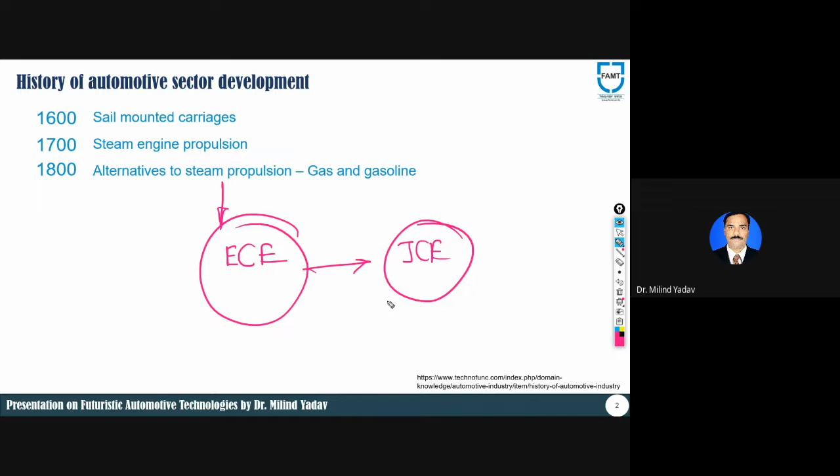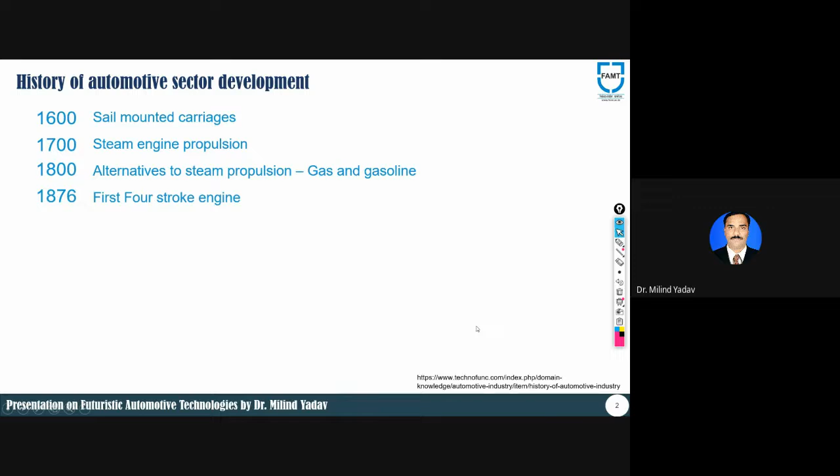Then came 1876, and in 1876 humans invented the first four-stroke engine.

Then in 1885 the real development started. The first practical automobile with a petrol engine was built by Karl Benz in 1885. Benz was granted a patent for his automobile in 1886, and then he began the first production of automobiles in 1888. His wife later on also proved it with the first long distance trip in August 1888.

Recently there was a video roaming around the social network everywhere, belonging to this same story, showing that the horseless coach was absolutely suitable for daily use. So that was the first development of the automotive sector, from where it started.

Then 1890 to 1910 - rather 1900 to 1910 - these are extremely crucial years in the history of the automotive industry. Industry as such started in this particular era itself. During the 1910s, the development of technologies and societal infrastructure continued, in addition to new manufacturing practices.

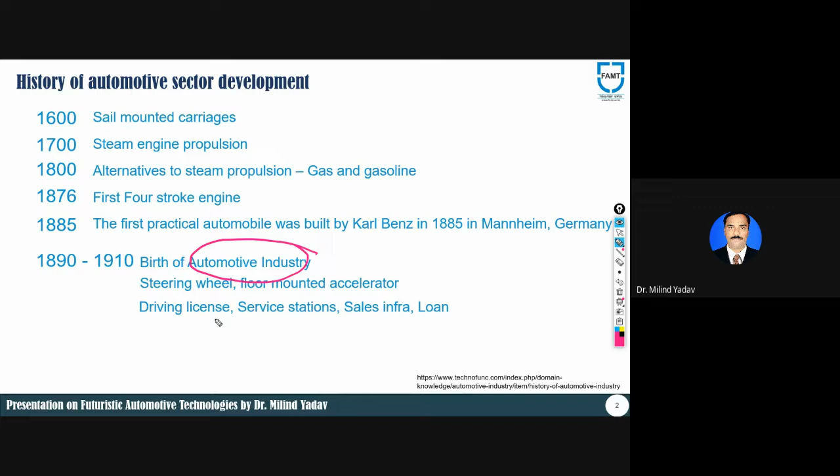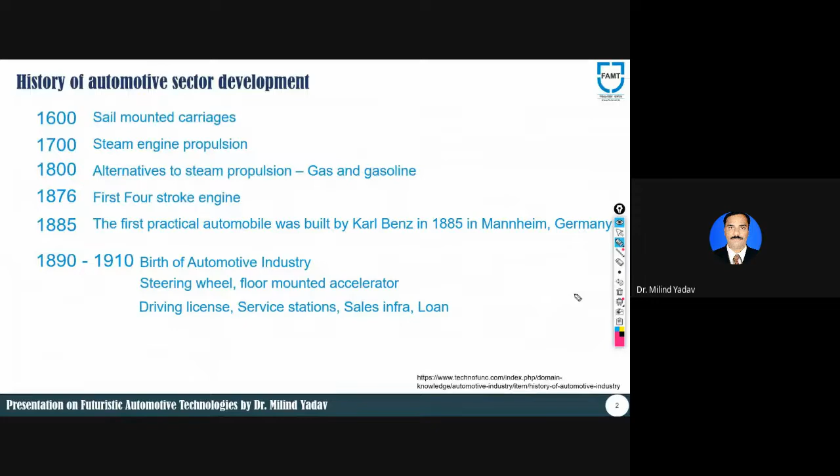In the same era, somewhere in 1908, Ford came up with his famous Model T. The mass manufacturing concept was introduced by Henry Ford - if I have to give you the precise number, it's 1913, where the concept of mass manufacturing started, basically scaling up production. Ford also introduced the concept of using interchangeable and standard parts, which further pushed the development of this sector.

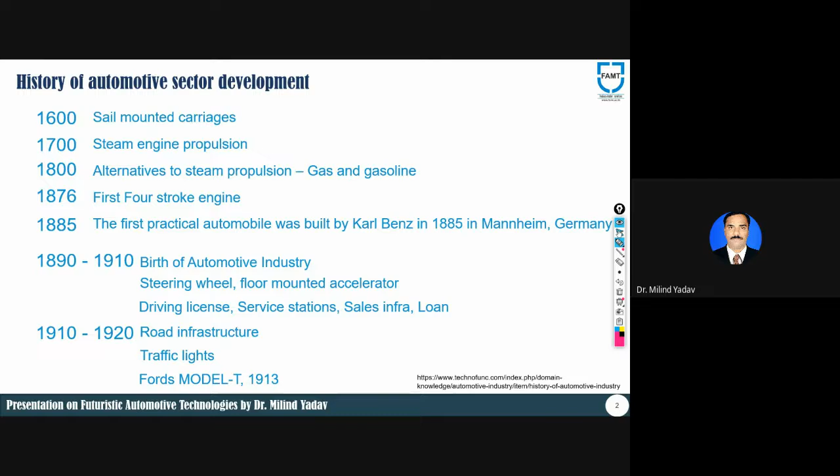Simultaneously, during this time itself, infrastructural developments like roads and traffic lights carried on. Then from 1920 to 1930, this is known as the era of mass production, and a variety of automobiles were available during this particular period.

Almost all the manufacturers, be it Benz, Daimler, Chrysler, or Ford, were involved in mass manufacturing. Ford stuck to the concept of a single model, the Model T, while General Motors adopted a new production technology and came up with lots of models, creating variety for buyers, which helped increase their market share.

After that, from 1930 to 1940, new market players entered this market, like Continental and Volkswagen. Even in this period, mergers of different companies took place, such as the Benz and Daimler merger, or the Chrysler and Dodge merger.

Then from 1940 to 1950, this is basically the era of...

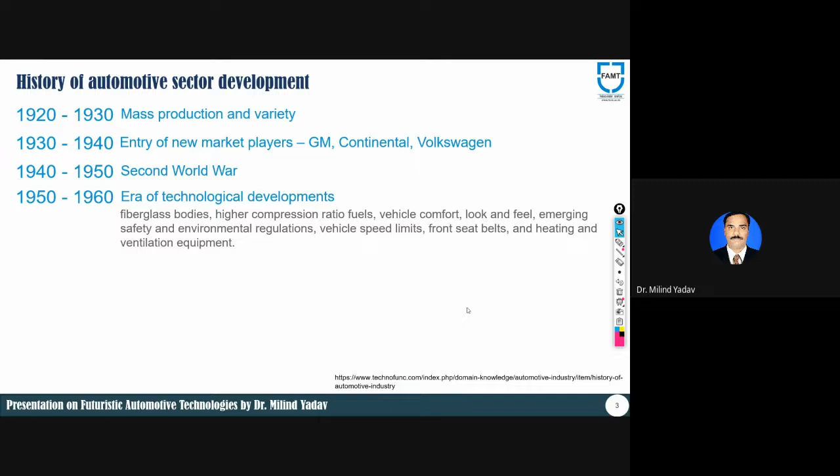Then during 1970 to 1980, we all know environmental regulations came, and emission norms came into existence. During this period itself, a part of globalization starts, and car exporting also starts, especially from Japan to the US.

And in 1980 to 2000, globalization actually started. Especially in India, we were a little late as far as globalization is concerned, but it basically started with mobile manufacturing way back in 2000, 2001, and then slowly we came closer to the automotive sector. So this is basically how the automotive sector has evolved.

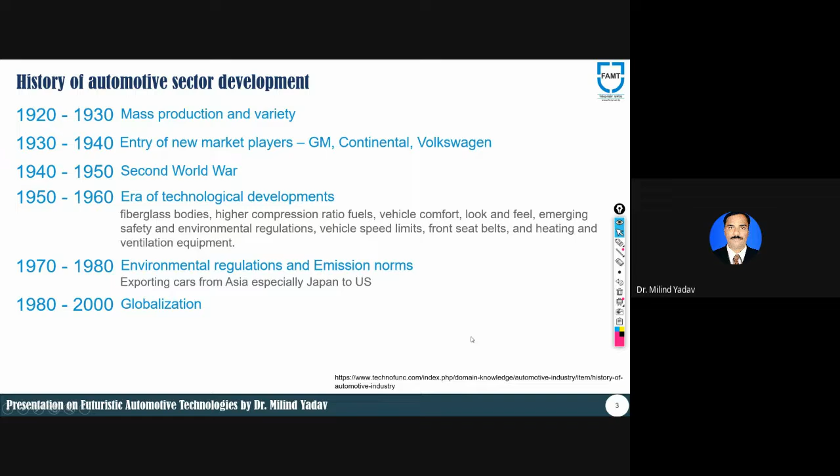Obviously there are a number of steps that must have taken place in between which I could not cover, but this is just a brief introduction.

We all know that autonomous vehicles are now taking over the charge. Autonomy is going to be the future. Then there comes the second one, connectivity - a lot of things are also happening in this sector. Then the third one is electrification of vehicles.

Then there comes artificial intelligence, AI. Then there comes big data analytics. Then there comes HMI, human machine interface, blockchain technology, and all.

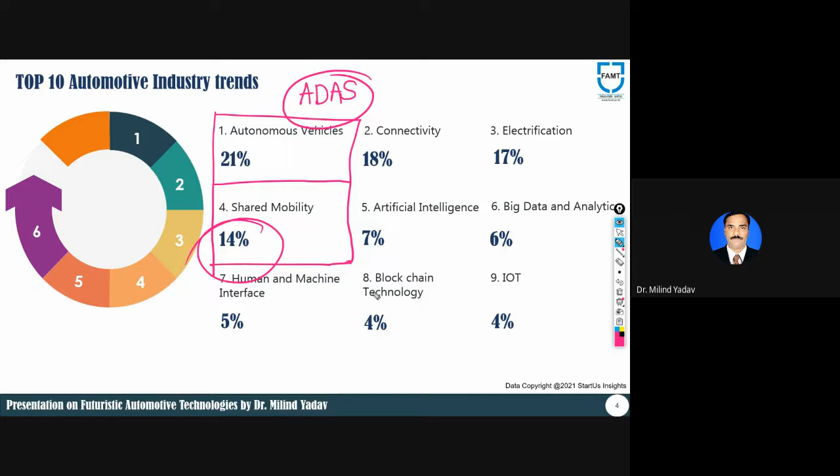Now, talking about others, let me throw light on some technologies which are not in highlight as far as the Indian automotive sector is concerned, but these are going to play a very crucial role in the coming days. Think of blockchain technology, big data analytics, or Internet of Things. In the near future, you'll find these numbers significantly grow.

As far as blockchain technology is concerned, you probably already know what a blockchain is, so I won't talk about that, but I'll talk about how it is useful in the automotive sector. Every vehicle will be given a digital identity, and every vehicle running on the road will have its own digital identity.

So now the car can pay for the use of road infrastructure, like toll booths or whatever it may be. Cities will also be able to charge for consumption and carbon emissions. On the other side, car owners can sell their seats.

If they're traveling from one place to another, they can offer a sharing of seats concept. They can also allow others to charge their vehicles, driven by batteries, if their own vehicle is not in use, and they can report flaws in infrastructure or accidents. These are the things proposed as far as blockchain technology in the automotive sector is concerned.

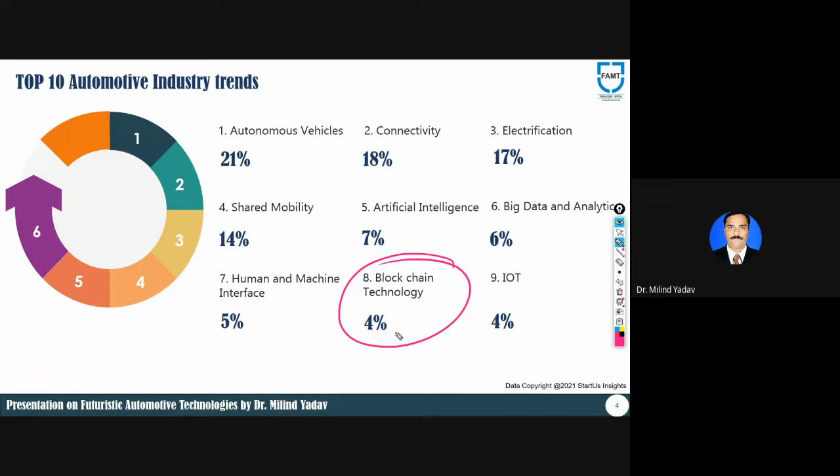Talking about this one, it is basically... sorry, not blockchain technology, rather I already had a discussion regarding this one. This one is basically big data and analytics.

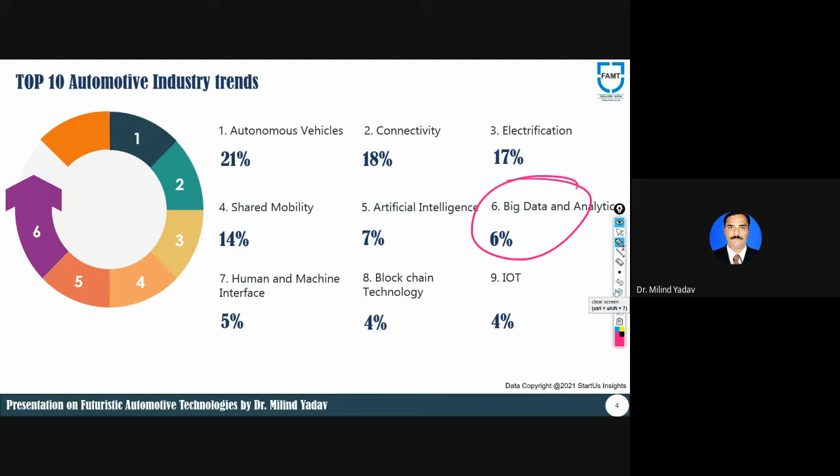So you'll be collecting a lot of data through GPS sensors, through cameras. And this data will be used by different agencies, maybe car leasing agencies, to predict the moment. Then these will give information regarding mileage, driver skill, driving pattern, and that data will be given to the insurance companies for warranty purposes, for maintenance, for predictive maintenance purposes, and a lot of other things. So even though the number you see right now is small, slowly, needless to say, these numbers are also going to increase in the near future, no doubt about that.

Now, like I said, in the initial phase you expect it to grow in this particular direction. And we have already started working on autonomous vehicle connectivity, and a lot of things are happening as far as electrification is concerned. This shared mobility sector is basically just beginning in India. You must be knowing Yulu, the Bangalore-based company which has entered into this.

So my concentration will be on the first and the fourth point as far as today's discussion is concerned. So let's start.

The point that I'll be discussing initially is Advanced Driver Assistance System, that is ADAS. Now let us try to understand what is basically the need of ADAS. That is an important factor.

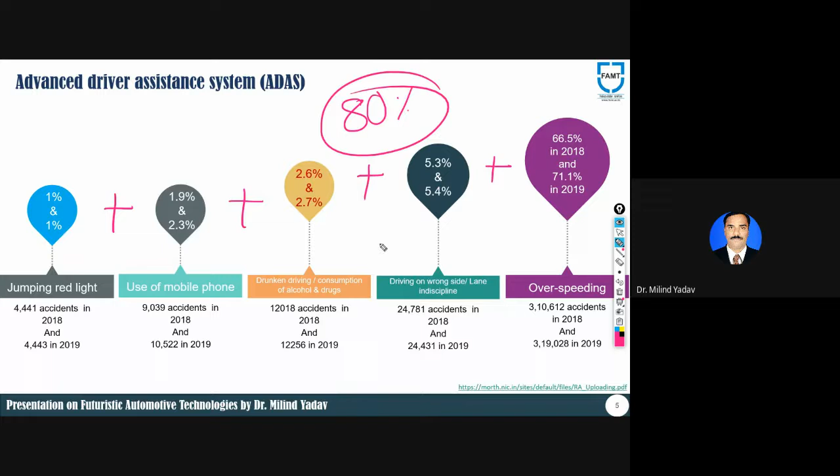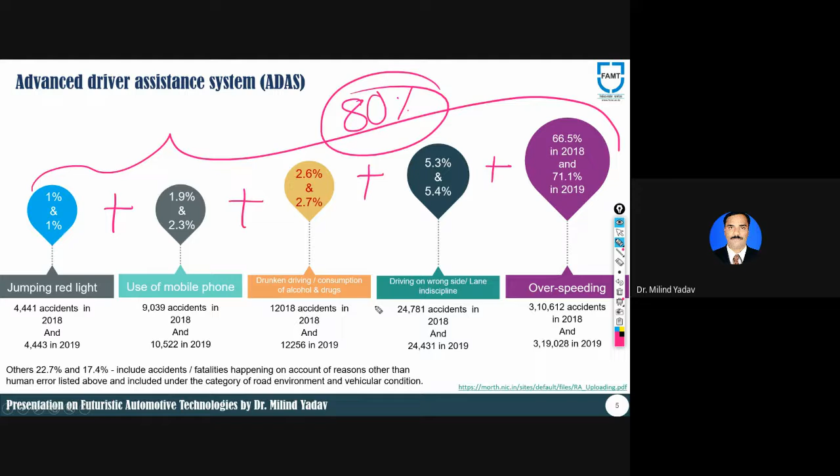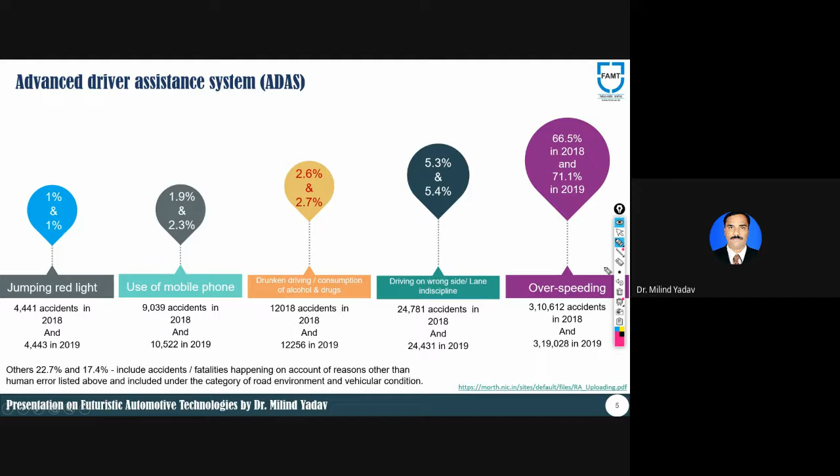And where does the remaining go? So the remaining 20% includes the accidents or fatalities happening on account of reasons other than human error. Now that may include road environment or condition of the vehicle, whatever it may be - a number of reasons for that. But these are the ones contributing as far as human errors are concerned. So by and large, it is well understood now that the majority of accidents taking place are basically because of human error.

Now, what is the solution to this one? Like I said, the majority of the accidents are taking place because of the driver. About 80% are happening because of driver mistakes during driving. So in order to prevent that, we are going to have a semi-automatic or a fully automatic vehicle control system that will not only take care of comfort, but will also take care of the safety of the passengers.

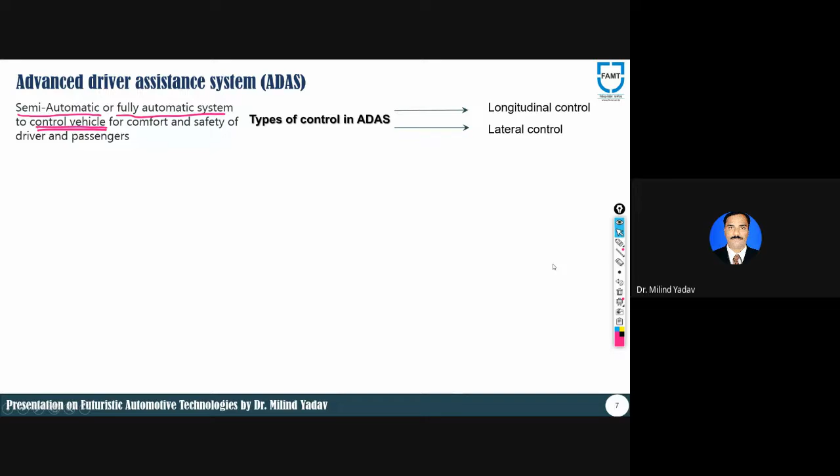So here it is proposed to have either a semi-automatic or a fully automatic system which is going to control the vehicle. Now, as far as controlling the vehicle is concerned, we can have two types of control: either longitudinal control or lateral control. Longitudinal control is typically referred to as speed control, and lateral control is basically referred to as steering control.

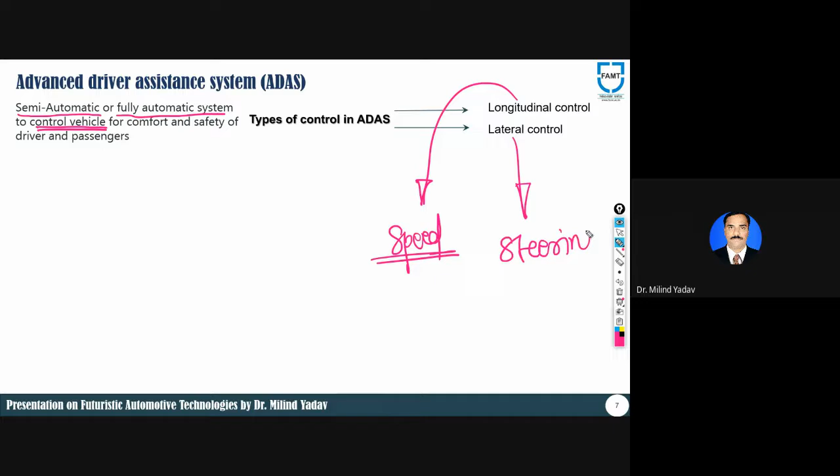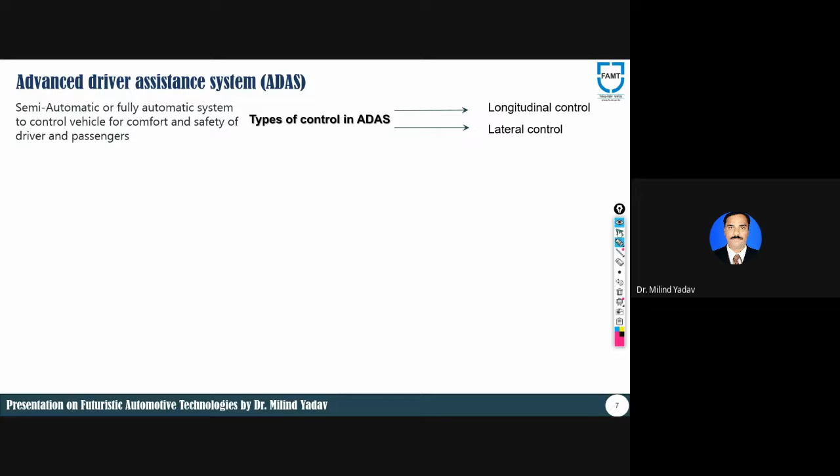By and large, we'll try to control these two things. Not only these two, but we'll try to control a few more systems as far as automobiles are concerned. So these are the overall systems that we'll try to control with ADAS. You can have control over a braking system, a steering system, a suspension system, the powertrain, and the battery systems as well. So all in all, this ADAS, advanced driver assistance system, can literally control these many systems as far as automobiles are concerned.

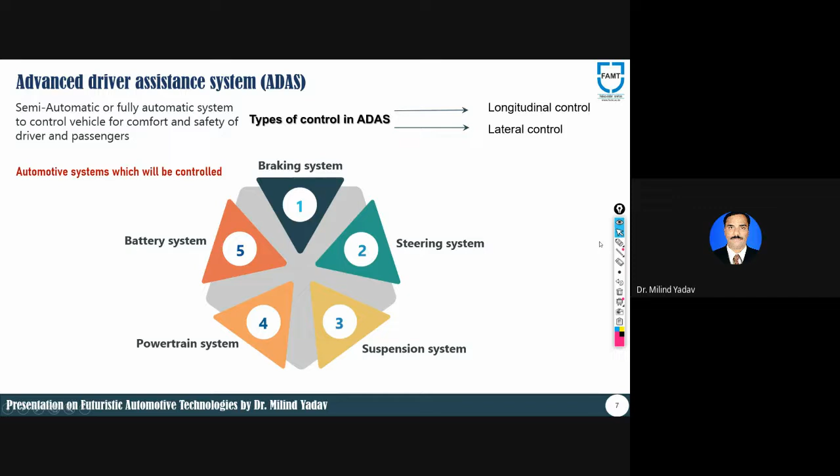Now let's slowly progress through. In order to control, obviously you need some data, right? So when the vehicle has to take a decision whether to stop, or when to have lateral or longitudinal control over the vehicle, then you should have some data from the surroundings. And to capture that particular data, your vehicle will be loaded with a lot of sensors.

Now I hope you are familiar with this one. I think you are familiar with the camera, you are familiar with radar. As far as lidar is concerned, it is basically light detection and ranging technology. It is a little bit costlier than radar, so hardly a few vehicles you will find loaded with this type of lidar technology. Now, for what purpose will we be using these sensors? Let's have a little discussion regarding this.

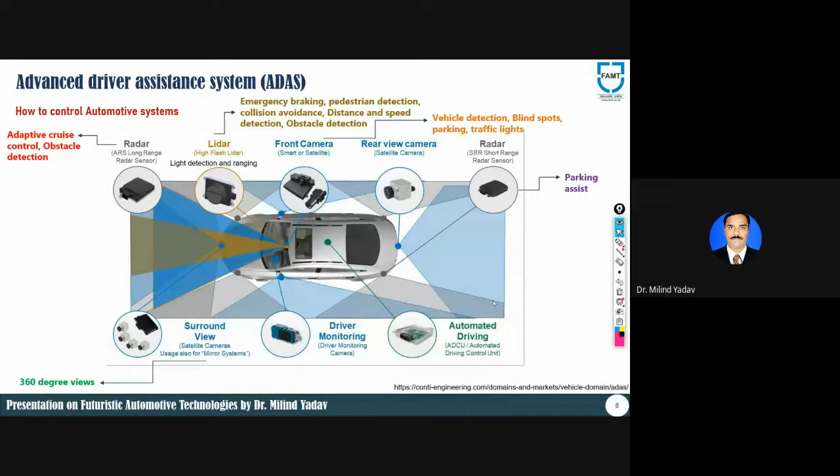So these are basically the cameras and the radars, and LiDARs rather, through which we will be creating a virtual environment. Rather, the car will try to identify that particular virtual environment for the decision making system. Now let us try to understand how these are basically integrated, how all these systems have been integrated.

So like I said, you'll be using a lot of sensors over here - I already talked about that. You'll be using cameras, radars, GPS for navigation, and other sensors, and these sensors are going to give surrounding information to the vehicle.

And then you will have one controller that is typically called the ADAS controller, and that ADAS controller is likely to give signals to the driver. If the driver doesn't respond to the signals given by the ADAS controller, then it is even possible for it to actuate the system - these are the systems we already talked about. It can control the braking system, steering system, suspension system, powertrains, battery systems, and many more. So this is how basically the systems are integrated in ADAS.

Now what we'll try to do is think of the warnings given to the driver. The warning will be in the form of a sound, so there will be exclusive speakers which are going to create a noise. Before that, the dashboard signals are activated. If the driver is alert, he can take the decision depending upon the signals on the dashboard. If not, if the driver is not responding to the dashboard signal, then the warning sound will be given.

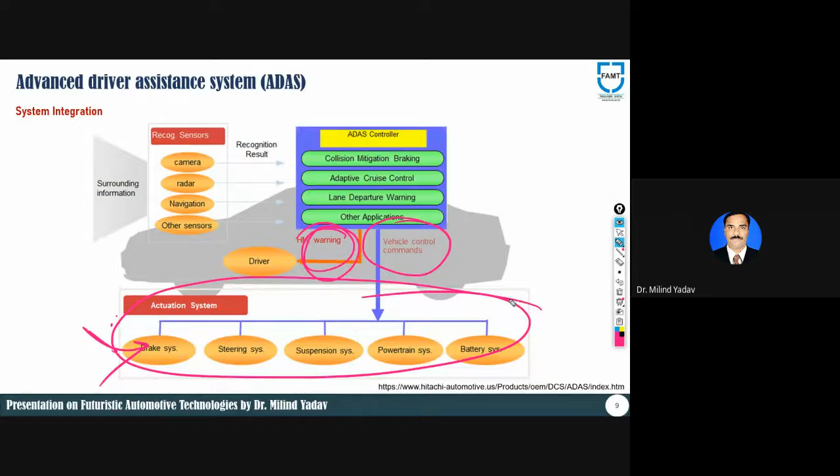And even if the driver doesn't respond to that sound, then in some vehicles it is possible to have vibrating seats or even a vibrating steering column, with the help of which your car will try to give a warning to the driver. And even if the driver doesn't respond to any of them, then the vehicle will take control - the ADAS controller will take control of the vehicle, and depending upon requirement, it will try to activate any of these systems. Most of the time, the control will be taken with the help of the braking system, in order to prevent accidents. So this is how basically the system is integrated.

Now what we'll try to do is understand the features of ADAS. Some of you might call this different types of ADAS or whatever it may be - I normally call this the features of ADAS.

And the first and most important feature of ADAS is obviously adaptive cruise control, typically called ACC. Now in this particular case, you'll have two vehicles - your own vehicle, which is typically called an ego car, and then there is one more moving ahead of your vehicle, which is typically called the lead car.

Now all of you must be knowing about this word, cruise control. What do you mean by cruise control? This is basically the system which will try to maintain the speed of the vehicle irrespective of the road condition. So you can literally fold your legs and simply have control of the steering, put your vehicle in cruise control mode, and it will carry on.

But adaptive cruise control is a little bit different than regular cruise control. While in cruise control, the vehicle will continue to run at a desired speed irrespective of road condition. When the system comes out of cruise control, if you are going to brake the vehicle, then it automatically comes out.

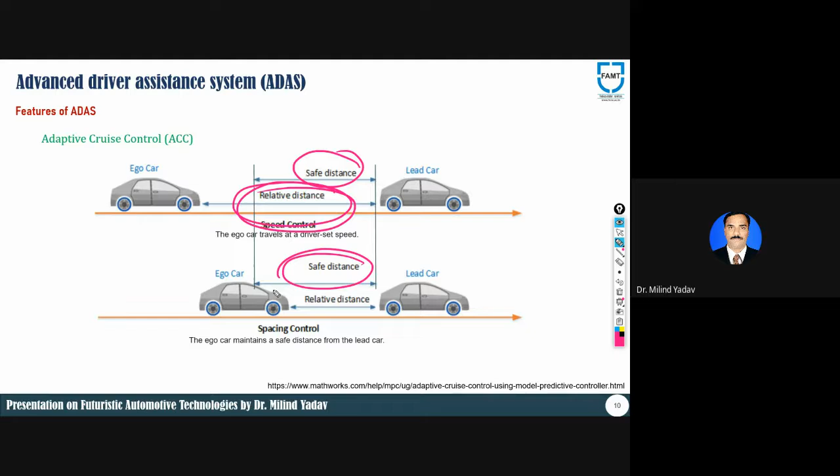Once the ego car crosses the safe distance, notice this - this is basically the safe distance. Now the distance between the ego car and the lead car is equal to the safe distance. If your ego car is going to cross this,

it will be noticed that the relative distance between the cars is now significantly dropping down, and immediately the ADAS system and ADAS controller will come into picture, and it will try to brake the vehicle automatically, maintaining this particular distance.

Now, if the speed of the lead car increases further, automatically this relative distance will increase. If this relative distance increases beyond the safe distance, the adaptive cruise control system will try to increase the speed of the vehicle, maintaining it in a regular fashion as that of regular cruise control. This is probably the best feature of vehicles equipped with ADAS.

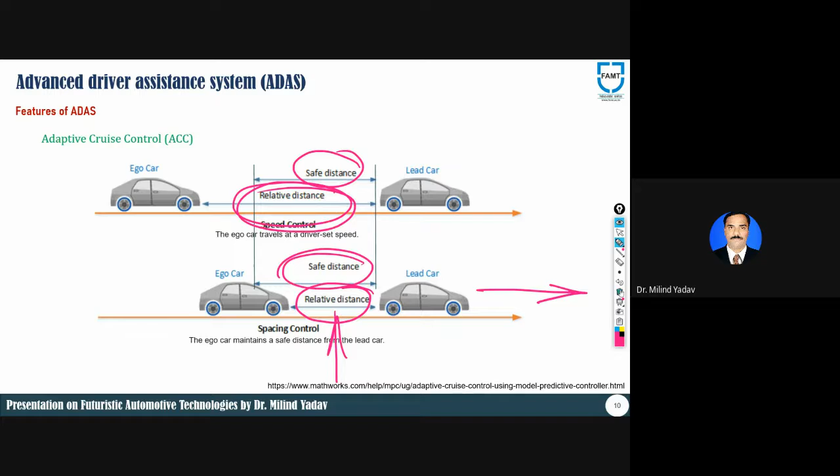That is the first one, adaptive cruise control, ACC. Moving on, the second one is AEB, typically called autonomous emergency braking. Now let me play this video so you'll have a brief idea.

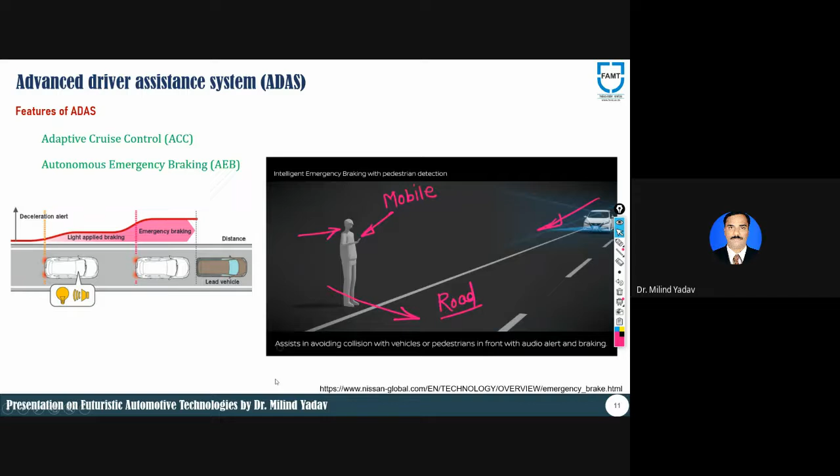Now if I play it one more time, please look at this - the vehicle is moving ahead, the pedestrian is moving on. The vehicle detects the pedestrian, and if the driver is not going to respond, the vehicle will be put into emergency braking. Now you must have understood the situation.

If I go to this particular figure, the situation is very similar to that of the adaptive control, right? What you see over here is the lead vehicle, and what you see over here is the ego car or ego vehicle.

The ADAS system will constantly monitor the speed and the deceleration rate after applying the braking. So once again, the same situation - look at this, the relative distance between the lead vehicle and the ego vehicle is dropping down, right? What is going to happen?

Initially, it will try to blink the signal onto the dashboard, giving warning through lights and through the sound system. But if the driver doesn't respond, for the initial phase it will try to apply light braking, and afterwards it will go into emergency braking, always trying to maintain the safe distance between the lead car and the ego car.

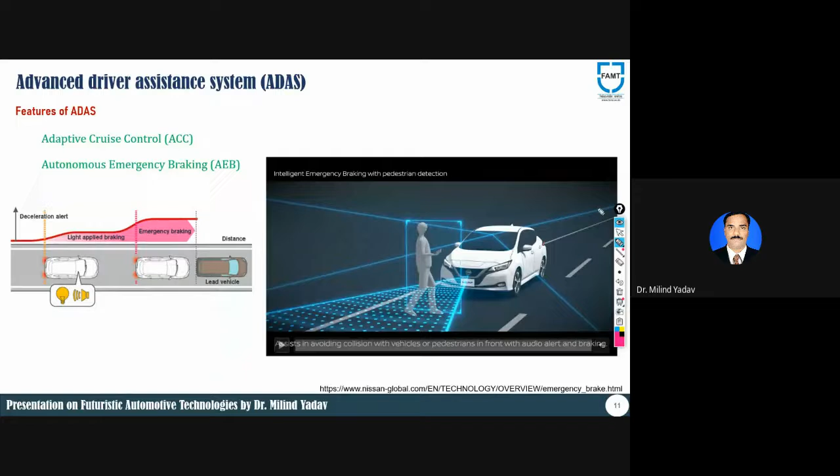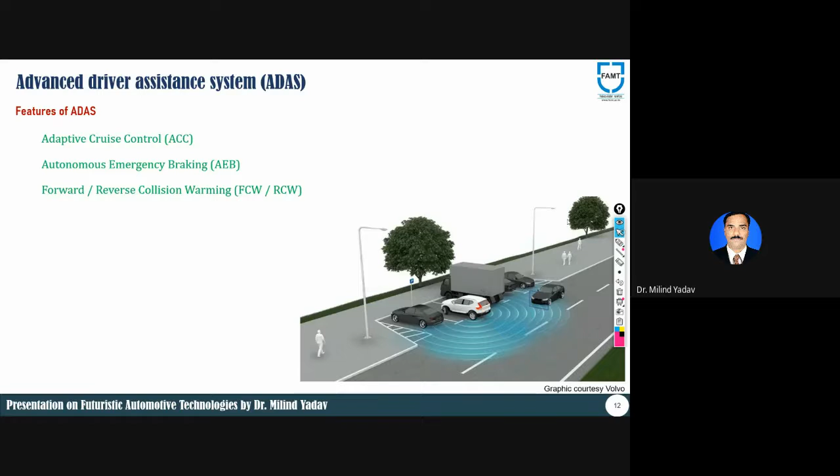This system has already been introduced in many cars. Nowadays you must have noticed that cars are fitted with proximity sensors on the rear side, together with the camera. This is basically part of that system itself. But in case of ADAS, the next step taken forward is to apply the brakes automatically, which is FCW or RCW, forward or reverse collision warning. Then there comes autonomous park assist, which is also very famous. A lot of vehicles nowadays are equipped with this, APS, auto park assist, or autonomous park assist, you may call it.

Obviously, the system is loaded with a display and cameras, on the front side as well as the rear side. Whenever your vehicle is driving and you are in search of a parking lot, most of the time the driver is going to hit the button inside the vehicle, and then the front sensor is going to start detecting for the empty parking slot, either with the help of the camera or the front ultrasonic sensors. It will try to find out the empty or probable parking slot.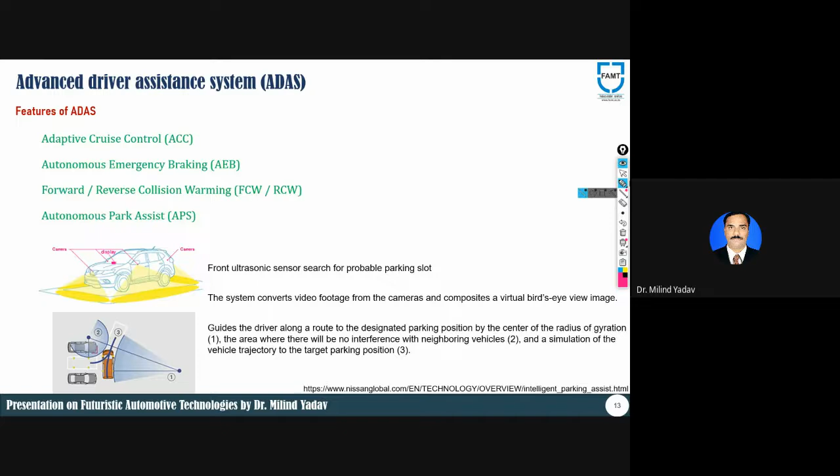Moving on, then there comes blind spot detection system, typically called BSD. By and large, every one of us must be knowing what is BSD, blind spot detection. Now, if you refer to any car, most of the time the structure of the car will be something like this. If I have to draw the structure, now you all are expertise in this one, but still I'm just trying to elaborate the things.

So it goes something like this: you'll be having a driver compartment, and then an engine compartment, this particular part of the vehicle. Then this is basically dedicated to the passengers, called the passenger compartment, and this is typically called the boot space. Now, as far as this construction is concerned, it is built on these pillars. Here is the first pillar, here is the second pillar, and here is the third pillar. This is typically called the A pillar, this is the B pillar, and this one is the C pillar.

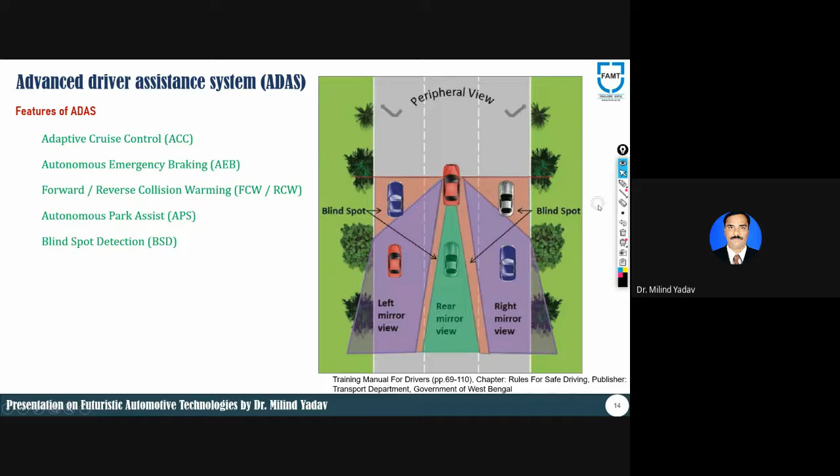Now obviously better road infrastructure is required, with the help of which it is possible for us to detect these lanes, and simultaneously it detects this particular distance as well. Now depending upon the lateral distance and the position of the lane, if the driver is decreasing this distance, then obviously a lane departure warning will be given to the driver.

And once again, the methodology will be one and the same. Initially it will try to display the signal onto the dashboard, then the warning through the sound system, and then if not responding, it will go to the braking. So lane departure warning is also a famous feature of the ADAS system nowadays.

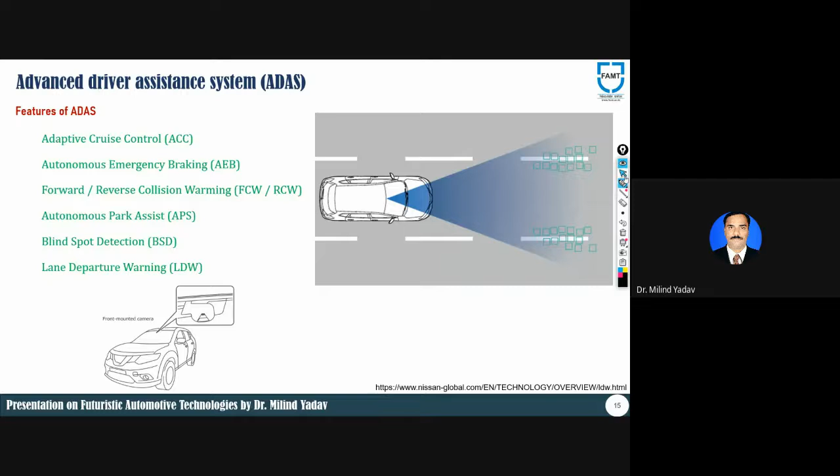Moving on to the next one is driver drowsiness detection system, typically called DDD. The latest vehicles, like maybe the XUV 700, recently from Mahindra and Mahindra, basically come with a driver's drowsiness detection system. There are different driver drowsiness detection systems available. Even some simple Python programming makes it possible to detect the drowsiness of the driver.

Some systems use cameras for the drowsiness detection of the driver, and a few systems which are a little bit more advanced try to analyze the driver's driving pattern in the first few minutes of driving. So starting from zero to the first few kilometers, it will try to identify how the driver is basically driving.

Then it will try to monitor the steering inputs given by the driver from time to time, depending upon different road conditions, and it also activates for no inputs from the driver. I mean, if it sees that the vehicle has to negotiate a turn and the driver is not responding to the system, this is going to come into the picture.

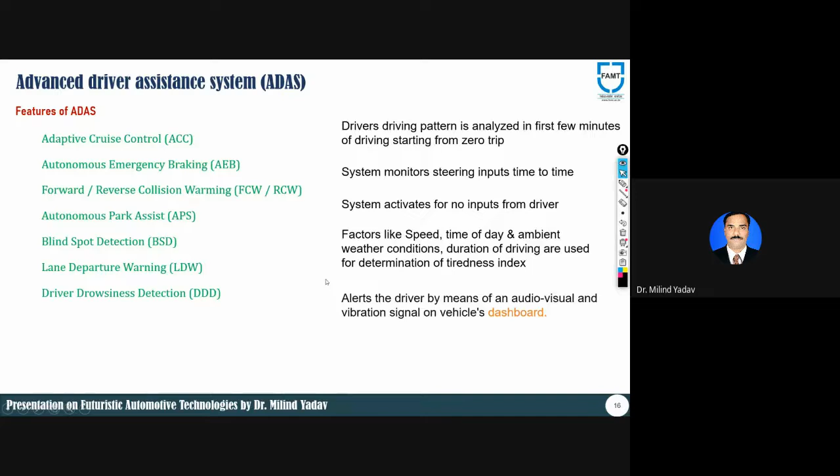Like I said, in case of the XUV 700, they have mounted a camera directly onto the front rear view mirror, next to the driver, and it constantly detects the movement of your eyelid. For a certain duration of time, if there is no movement of the eyelid, it immediately brings this system into activation. So that's the driver's drowsiness detection system, one more feature of ADAS.

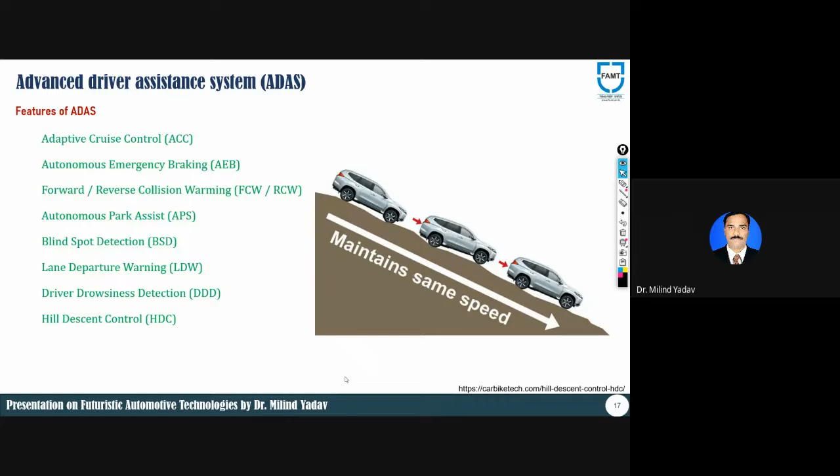Then there comes hill descent control, HDC. By and large, the system works in a similar fashion. Whenever it is going down, it always tries to maintain the speed of the vehicle while descending. If the speed goes beyond a certain set speed, then the braking system comes into the picture. If it comes across a lead vehicle, it will try to maintain the distance between the two vehicles, and there are many such systems. The traction control system, TCS, also helps in hill descent control.

Moving on, then there is adaptive headlight assistance system. This basically comes into picture especially while night driving. Most drivers have a habit of driving on high beams. So whenever a vehicle comes across another vehicle coming in front of it, considering the position of that particular vehicle, most of the time the right hand headlight will be switched to dipper mode, and the left hand will be kept on upper mode. This way the driver can have a clear view of the left hand road condition, and the vehicle coming in front will not get disturbed because of the high beam. That system is typically called adaptive headlight assistance.

With this, I've tried to give you a brief idea about the different features of the ADAS system. Now we'll try to talk about the autonomy levels in ADAS, and what their current status is.

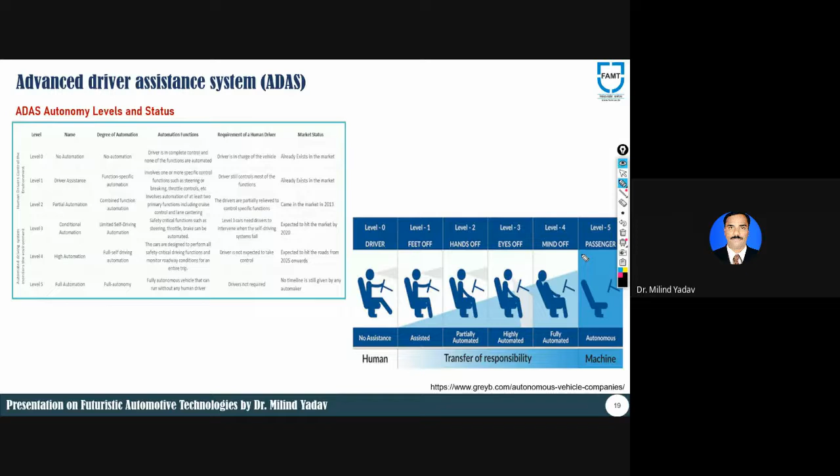Level 5 autonomy is full automation, which we call a complete autonomous vehicle - it can run without a driver at all. Drivers are not required. The testing of fully autonomous vehicles is still going on, but full-fledged autonomous vehicles are not yet running on roads. To some extent we have obtained autonomy, but I would say we are somewhere lagging. We are trying to transfer the responsibility from the human to the machine. As far as India is concerned, we are lying somewhere in between.

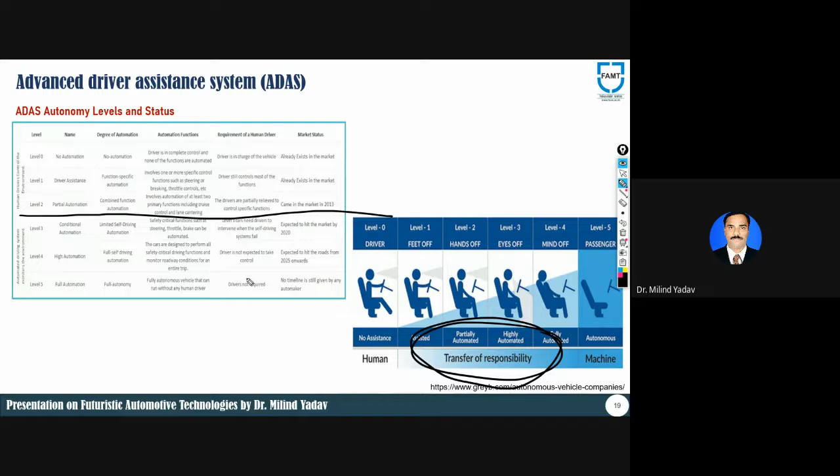Moving on, we will be talking about these points as far as ADAS systems are concerned.

As far as global suppliers of ADAS are concerned, Continental is into this business, Bosch is into this business for so long - this sector is basically dominated by Continental and Bosch itself. Denso is also there, Aptiv is also there, Autoliv is there, Magna is there, and Valeo is also there into this advanced driver assisted systems space. They are basically the suppliers - needless to say, they are not manufacturing their own vehicles, rather they are offering these kinds of systems to different automotive manufacturers. These companies manufacture technologies that are purchased and adapted by different automotive manufacturers into their vehicles. So these are basically the global suppliers of ADAS.

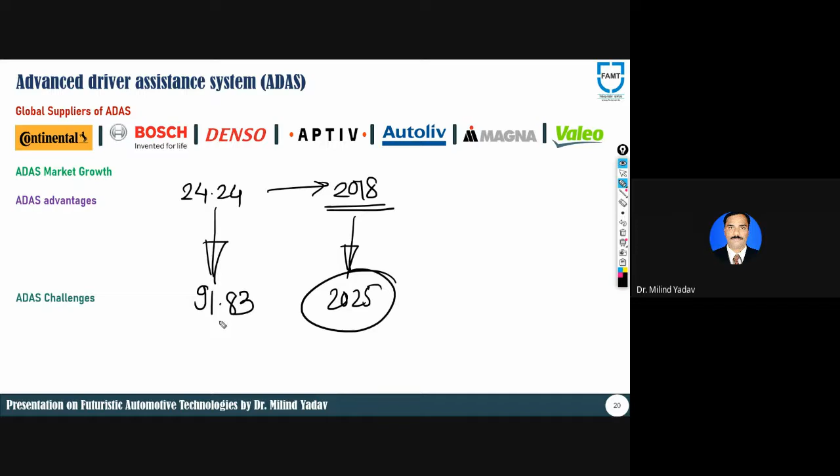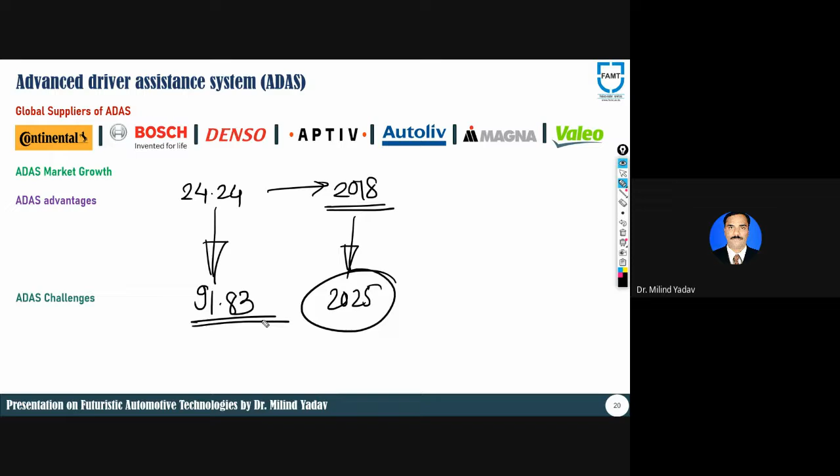Talking about ADAS market growth - this is a big market. To give you the numbers, it was a $24.24 billion industry in 2018, and by 2025, just the next 4 years itself, this will have a jump to $91.83 billion. So all in all, it's a huge industry, and lots of developments are going on.

Talking about ADAS advantages, by and large you must have understood what could be the probable advantages of this particular system. It basically tries to avoid human errors, minimizing them so that error-free operation will be possible with ADAS as such.

That is basically the objective of this particular system, and that takes into care increased road safety as well. It is taking control of the entire vehicle if the driver is not going to respond to the road condition identified by the vehicle itself. It basically alerts the driver in case the vehicle has a problem. To some extent, it is also easing out the driving experience with human machine interface, and this is going to help us obtain high safety standards.

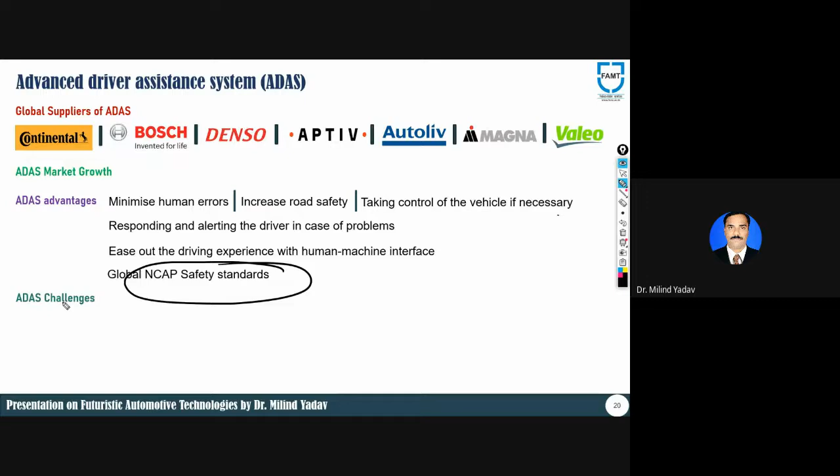Now you must be knowing that there is Latin NCAP rating, there is global NCAP rating, where the automotive manufacturers are struggling to reach the safety standards. So with ADAS, it is possible for us to reach very high safety standards. So these are typical advantages.

Well, the system also comes with challenges, and there are too many of them. I have tried to highlight some of them right over here. The first and most important is we are still missing efficient database management infrastructure. The data collected is huge, and you are badly in need of a database management system. That data is basically collected from different types of sensors, from cameras, whatever it may be, and you are badly in need of good software to process the data received from different sensors. So probably we are still lacking in this particular technological development.

The second, probably the most important one, is that this particular system is to some extent proven, but whenever a manufacturer proposes any kind of ADAS system, it has to go through 1 million kilometer testing to prove its capability, and this testing is obviously time consuming. It takes a lot of time. 1 million kilometers is huge. So that is one more challenge.

The next one is the cost of cars. Especially if I have to talk about Indian cars, most of the Indian automotive sector is basically dominated by the hatchback segment, and if you look at the cost of the hatchback segment, that ranges between maybe 6 to 8 lakhs. If at all you wanted to incorporate ADAS systems into hatchback cars where the cost ranges from 6 to 8 lakhs, it becomes a challenging task. So that is basically the biggest challenge as far as the ADAS system is concerned, the cost.

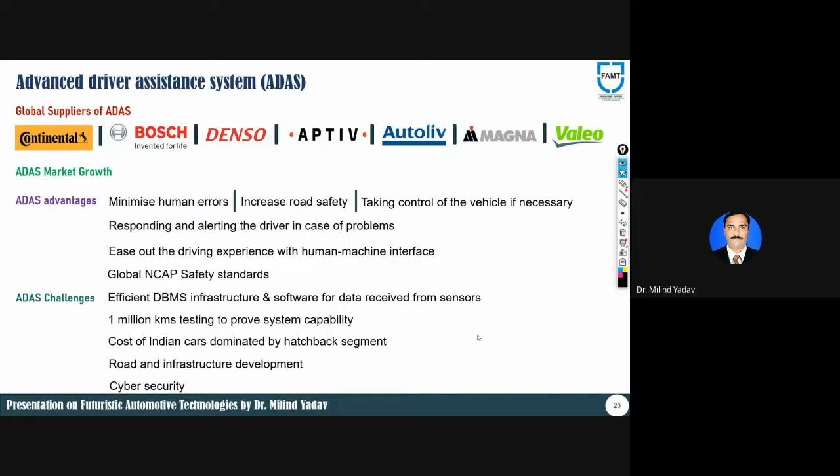Okay, now I'll switch over to the second part of my presentation, the technology which I'll be talking about, and that is micro mobility. Now, as far as micro mobility is concerned, if I try to split this particular word, it is basically micro plus mobility. Now micro stands for small, obviously we all know that, and mobility refers to the ways of getting around, you try to roam around. So it's the smallest possible way of getting around.

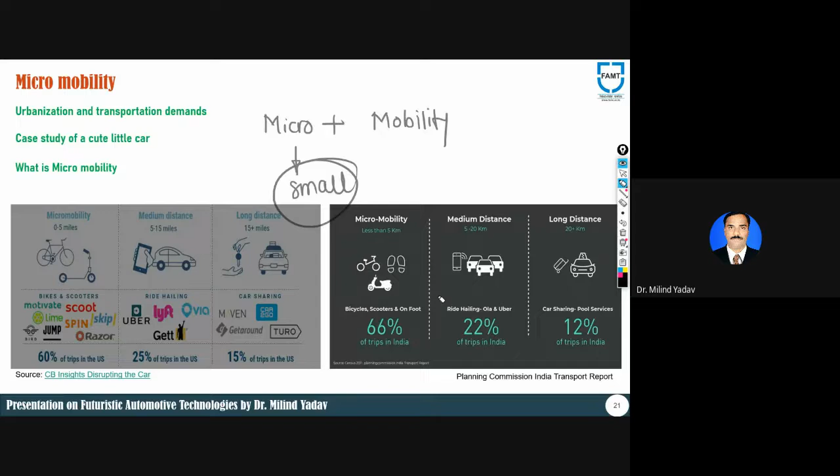That is exactly what micro mobility means. Now what I try to present here is two sets of data. One is data given by the Planning Commission of India, and the second one is basically from the US. If you look at this data, you'll understand it has been segregated by distances.

Let me check this one out. Can you see this? This is 0 to 5 miles, this is 5 to 15 miles, and this is 15 plus miles. This data is related to the United States. On the right hand side, this belongs to India, given by the Planning Commission of India. This is for less than 5 kilometers, this is 5 to 20 kilometers, and this is 20 plus kilometers.

Now what they have done is the total trips, all the entire trips, are divided into three categories: 0 to 5 miles, 5 to 15 miles, and 15 plus miles in the US. In case of India, they divided it into less than 5 kilometers, 5 to 20 kilometers, and 20 plus kilometers. Now look at the percentage.

It is observed that we basically use either cycles or bikes most of the time if we wanted to travel a distance less than 5 kilometers. Same is the situation as far as US is concerned. They use cycles for shorter distances, and that contributes 66% of total trips in India, and 60% of total trips in the US. So bikes, scooters, or maybe walking, even in case of India, 66% of the trips fall into less than 5 kilometers.

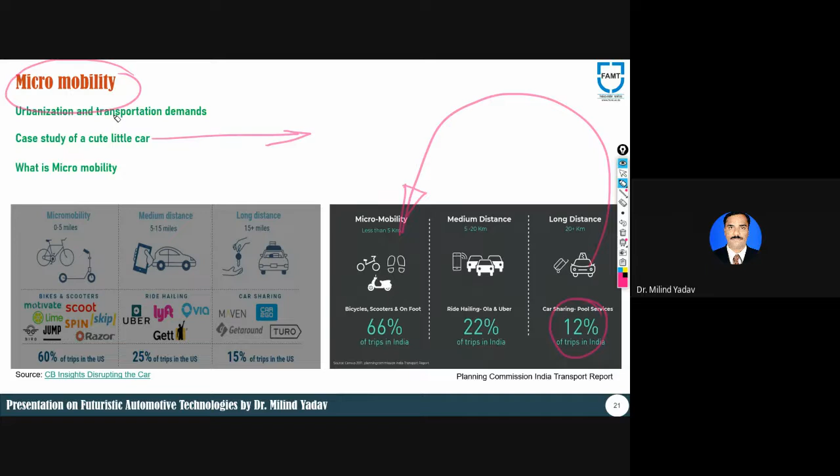Right now, like I said, you will be using different types of vehicles for this particular purpose. These will not be vehicles which are similar to cars. These will be altogether different vehicles, and which category of vehicles that we'll be using. But before that, let's try to define what is micro mobility.

It is basically the small transportation modes which are either propelled by humans or by electric motors, with the speed range well below 50 kilometers per hour. That is basically the definition of micro mobility vehicles. It can be driven through humans or through electric motors, no problem with that, but the speed is below 50 kmph.

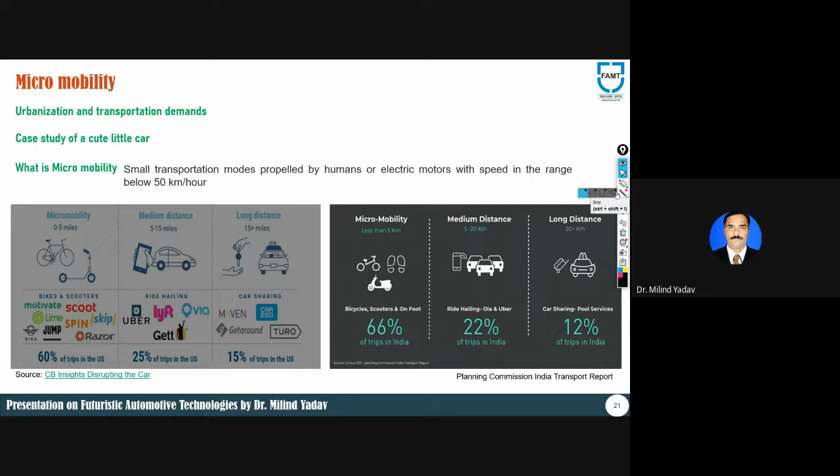Now let us try to understand what category of vehicles these will be. So let's try to classify micro mobility vehicles. Initially, I'll try to classify it into 4 different categories. They call it as type A, type B, type C, and type D.

As far as type A and type B are concerned, these are basically either powered vehicle or unpowered vehicle, and type C and type D are powered vehicles. Powered vehicles means obviously they will be battery powered, needless to say.

As far as top speed is concerned, for type A and type B vehicles, the top speed can go maximum up to 25 kilometers per hour, not more than that. As far as type C and type D vehicles are concerned, this can be ranging from 25 kilometers per hour to max 50 kilometers per hour. Mind you, if the speed is increasing above 50 kilometers per hour, that is not going to fall into the category of micro mobility.

Then there comes gross vehicle weight, which is GVW. In type A categories, the GVW falls well below 35 kgs. In type B category of vehicles, the gross vehicle weight can be from 35 to 350 kgs. Similar is the case for type C and type D vehicles: GVW is well below 35 kg for type C, and well between 35 to 350 kgs for type D.

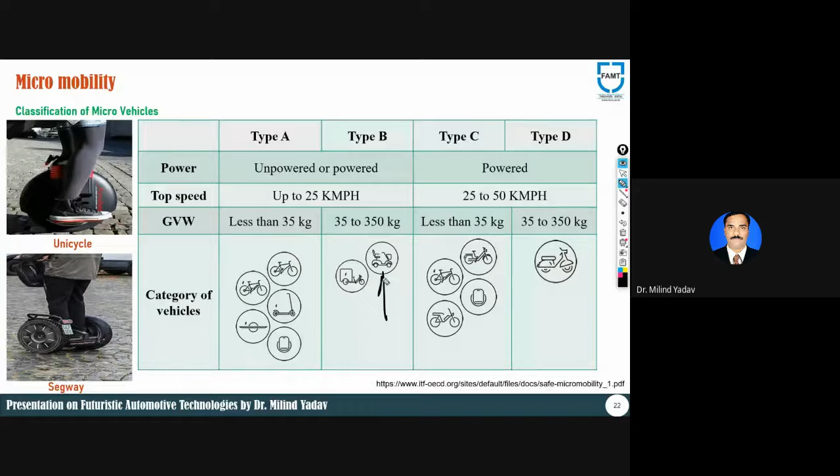Segways are slowly becoming popular, especially in India, and that too on tourist spots or some of the historical places, where they have given arrangement of segways to travel around. Talking about type B category of vehicles, once again same situation: it will be a two-wheeler, rather it will be a three-wheeler or a four-wheeler. Obviously, what you see right over here is obviously a passenger carrier, and what you see right over here is obviously a goods carrier.

That's why you will find the gross vehicle weight ranges between 35 to 350 kg. Moving to type C, the category of vehicles will be one and the same. So even if you find a battery powered cycle, or a two-wheeler, or a unicycle, or even a Segway in this particular category, that's why basically you'll find the GVW is less than 35 kgs. And the last one is this, which is obviously our own electric two-wheelers.

Now this concept of micro mobility is slowly becoming popular even in metropolitan cities, especially with need of transportation. That's why I'm highlighting this one, for transportation of item deliveries - maybe a product ordered from Amazon or Flipkart, or a pizza ordered from Domino's, or a local supplier, whatever it may be. They have started using this kind of vehicle. So it is slowly becoming popular in India, but we have yet to achieve a lot of goals as far as this micro mobility is concerned.

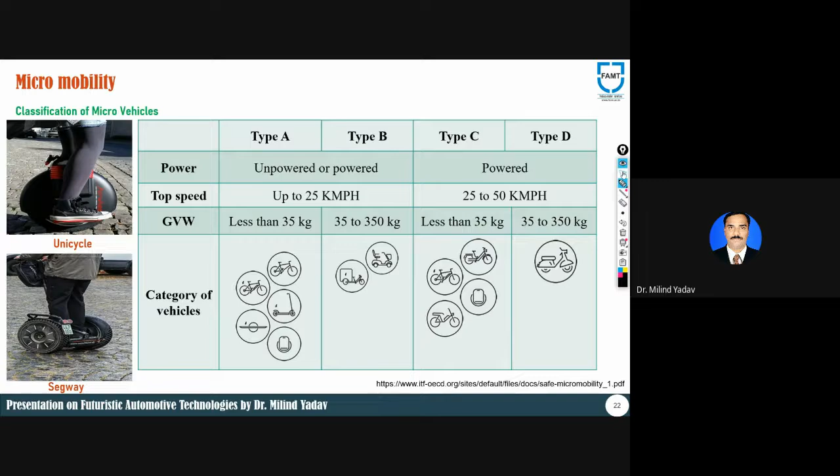Now, Society of Automotive Engineers have also classified micro mobility vehicles, so I'll try to put that forward. Slowly we are coming to the end of my presentation. So this classification is basically depending upon certain features or characteristics of the vehicle, which I'm trying to put forward.

So either it can be a powered bicycle, a powered standing scooter, a powered seated scooter, a powered self-balancing board which I was talking about earlier, Segway, then a powered non-self-balancing board, or it can be powered skates, a unicycle. And talking about the features, I'll consider center columns, seats, operable pedals, floorboard or foot pegs, and possibility of self-balancing.

Now, if you look at this one, center column is present, seat is obviously present. You can operate it with pedals if possible. Floorboard is possible to some extent, and self-balancing is obviously not possible as far as powered bicycles are concerned.

Then for powered standing scooters, center column is obviously there. Seat is not there because it's a standing scooter, needless to say. Operating pedals are not there, because you have to either drive it by an electric motor, or it can be human driven. Footboard is present, and self-balancing is not possible - the driver has to balance it on their own.

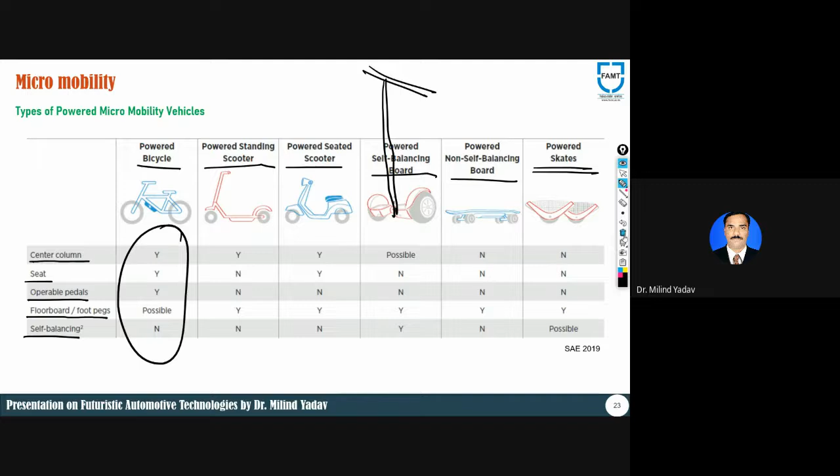And then there comes the last one, which is powered skates. Center column is not there, seats are not required, once again you'll be standing. Pedals are missing, floorboard is there, and obviously self-balancing is possible in this one.

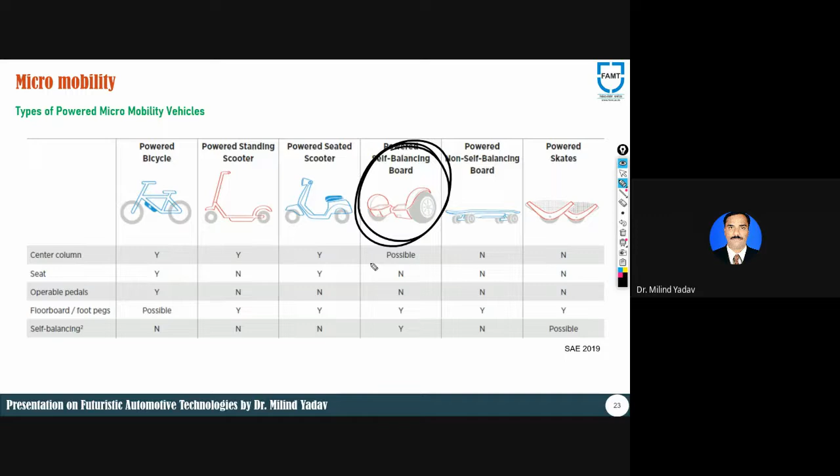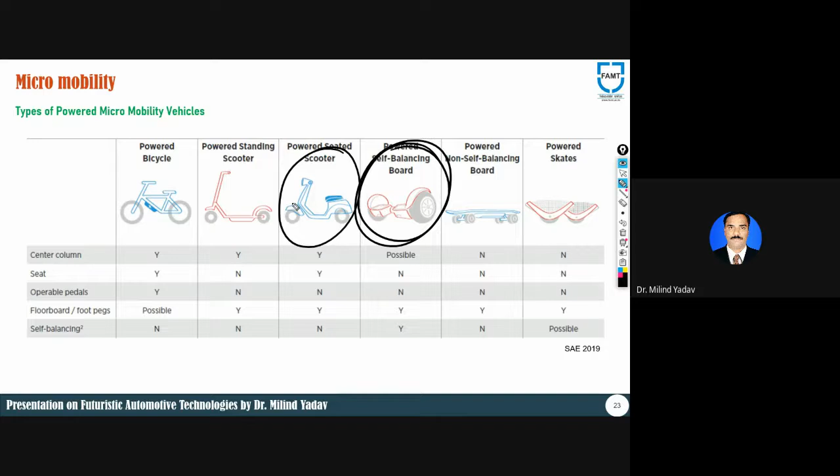So out of these, like I said already, this is becoming very popular as far as historical places or tourist spots are concerned. This one is typically used by fleet operators, or maybe goods suppliers. This is also famous as far as Indian two-wheelers are concerned. Now we have also started using this one for a shorter duration of time, and even we have started using powered bicycles as well.

Moving on, let me finally talk about the advantages and challenges of this particular technology. Well, the first and biggest advantage going for this one is obviously it is the most affordable technology - the most affordable. Like I said already, for a shorter duration of time, instead of using a 10 lakh car, it is easy for you to go with a bike of 14,000 or maybe 15,000, bicycle rather.

Powered bicycle, right? So this is basically the most affordable solution of mobility. I've already talked about the environment. Cars are polluting, and the Delhi state government is trying to ban diesel and petrol cars, so you must have heard about that. But if you think of micro mobility, all of these are driven by electric motors, battery operated, so obviously they are environment friendly.

Ease of congestion, especially in urban cities, is the biggest advantage of micro mobility. You can cover the distance very easily, and that too in the shortest possible time. It is even useful for physically challenged persons, though this is used outside India, not yet in India. So these are basically the advantages of micro mobility.

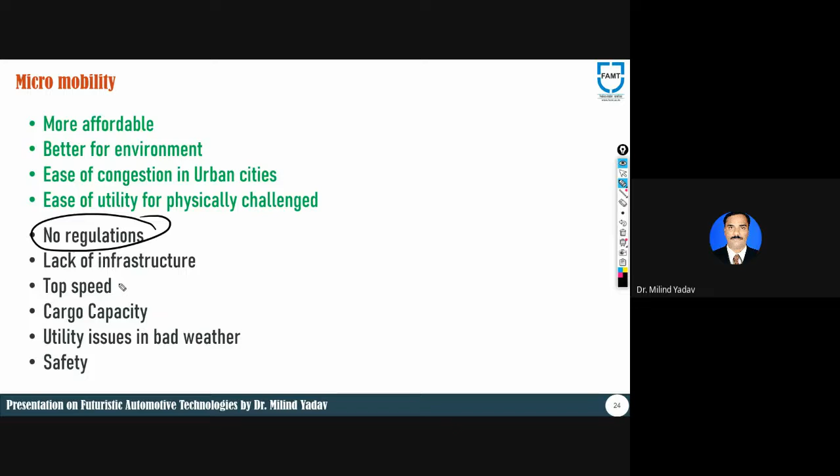Segway, let's say, at a speed of 50 kmph, and then you hit some other vehicle. That can cause serious injuries to the driver, obviously. So the safety issues arise not only because of regulations, but because of the structure of the vehicle itself. So these are some of the challenges of this particular technology.